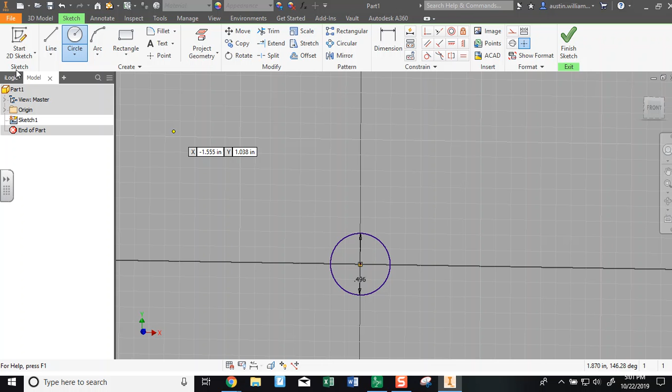And then on top of that, what I'm going to do is extrude that circle and give it some depth. That depth was about 1.059 inches, and here's what I got for my Tootsie Roll.

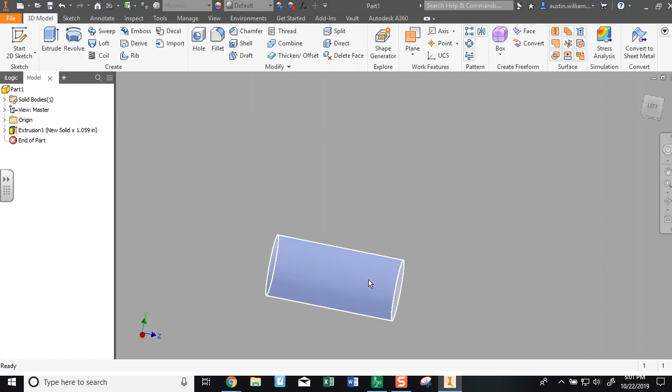Now we do know Tootsie Rolls have a brown color, so I'm going to hold the Shift key and click on each part. When you highlight each part, it allows you to change the color of multiple parts all at the same time. What I found is a good Tootsie Roll color is all the way at the bottom - a color called Walnut Natural Polished, and that makes a pretty good Tootsie Roll color.

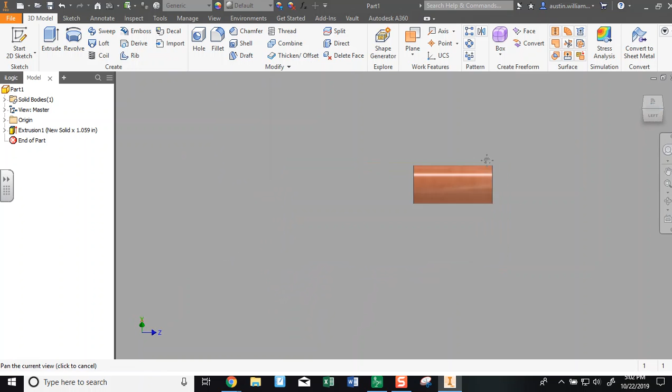Now that I've got my Tootsie Roll, I'm going to make my label. So very quickly, I'm going to start a new sketch, but I want to start my sketch right above this. In order to do that, I need to turn on my origin folder.

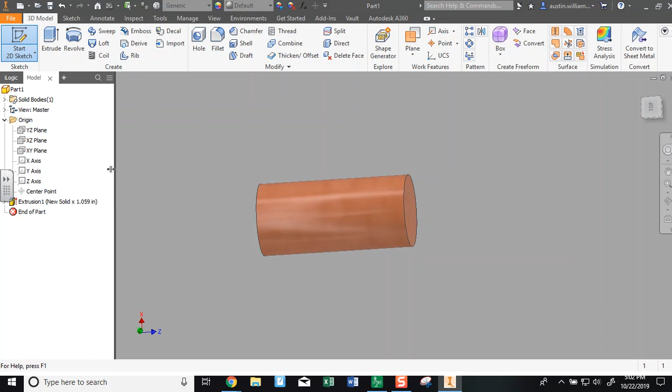So if I zoom in just a little bit, you can see that I can turn on one of these planes to allow me to draw sketches on them. Right now they're invisible, but I can start a new sketch on one of these, allowing me to draw a sketch above my Tootsie Roll.

We know the wrapper is a rectangular shape, and then I'm going to hit Finish Sketch. Oh wait, I'm going to go back there and dimension my sketch first.

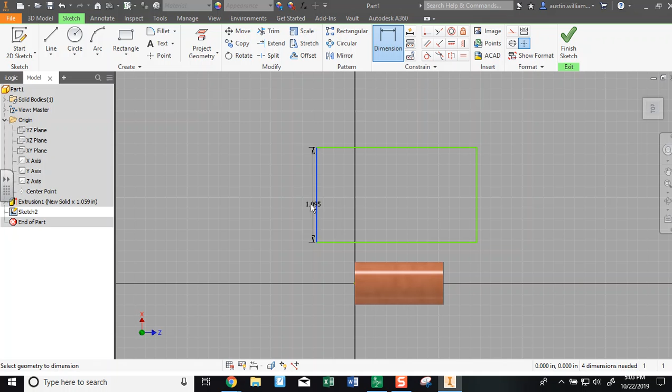So what I found out is my wrapper is... 1.3456, no sorry, 3457 inches. And then that width was 2.4788. Alright, and now I want to center this over my Tootsie Roll.

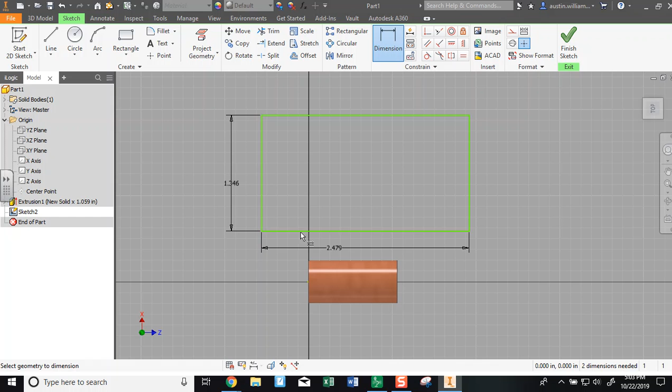So what I'm going to do is use this Move function. Move allows me to take an object - I'll highlight all that square, and I can move it where it's going to go. So I've highlighted all of it, select where I'm going to be moving it from, and that allows me to shift it just a little bit and line that up better.

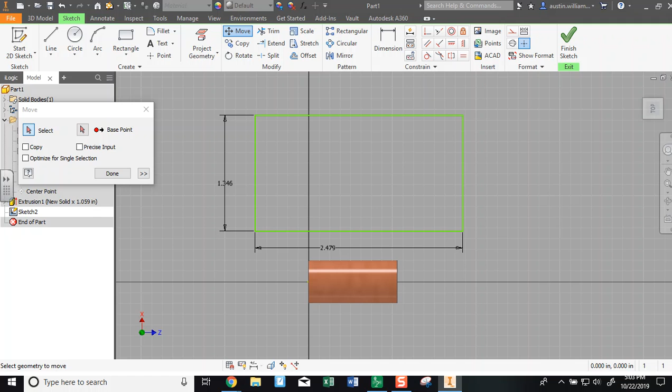Now what I'm going to do is hit Finish Sketch, and make my thickness of my paper. Now it's not going to be much, but my dial caliper showed me that the thickness of the wrapper was 0.041 inches thick.

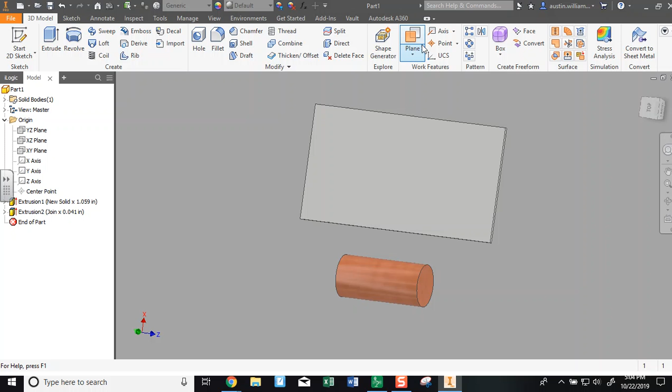And here's where the interesting part comes from. We could just color this white for a wrapper, but we're actually going to do a decal. In order to do that, I'm going to click Plane and Offset from Plane. This allows me to draw a sketch offset from another object. So what I've done is clicked on the face and dragged that new plane a little bit off of it. Click OK, call it done.

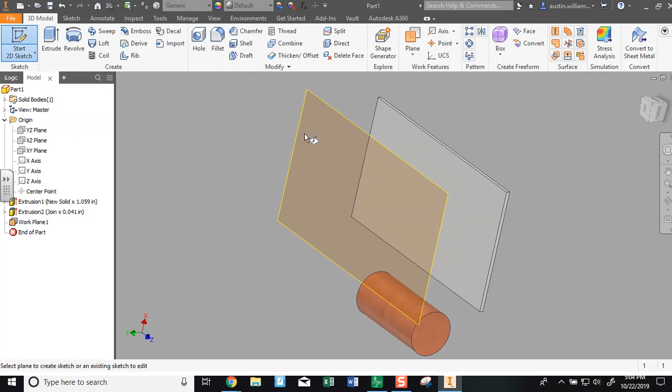Now what I'm going to do is start a new sketch on that plane that I just made, and I'm going to insert an image. What I've gone ahead and done is in my downloads folder, I should be able to find my Tootsie Roll wrapper. So Tootsie Roll right here.

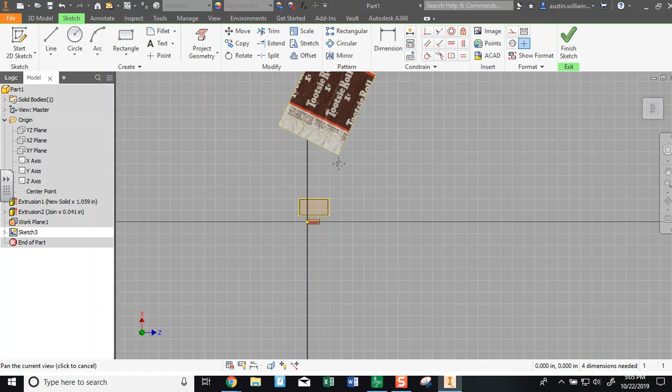Now it might come in very large, that's okay. What we're going to do is scale it down so that I can use this Tootsie Roll. Now the way to scale down an image is if you go to the bottom right corner, a little box will appear.

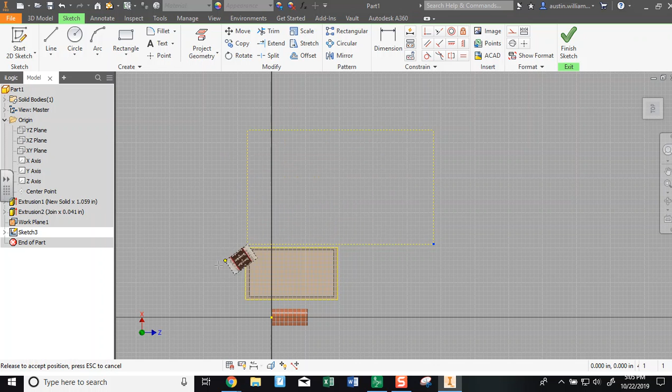That allows me to change the image around. I can rotate it, I can spin it. If the image is backwards, if you go diagonally, it'll reverse the image. That looks about the size I want it to be, so I'm going to bring it right over my label and hit Finish Sketch.

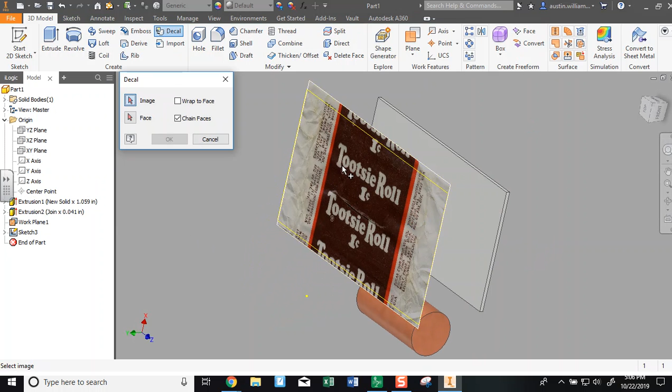Now I'm going to do a thing called Decal. Decal allows me to take an image and put it on the face of any object I want. So I click my image, then click the face I want, click OK. What it did is it took my Tootsie Roll image and put it on my wrapper.

I'm going to make that work plane invisible, and now I've got my Tootsie Roll. I'm going to save this.

I'm going to go back to my Inventor folder. On your desktop, you should find your Inventor folder. Tootsie Roll, I've already made one, so I'm going to go ahead and call that Tootsie Roll IPT, hit save.

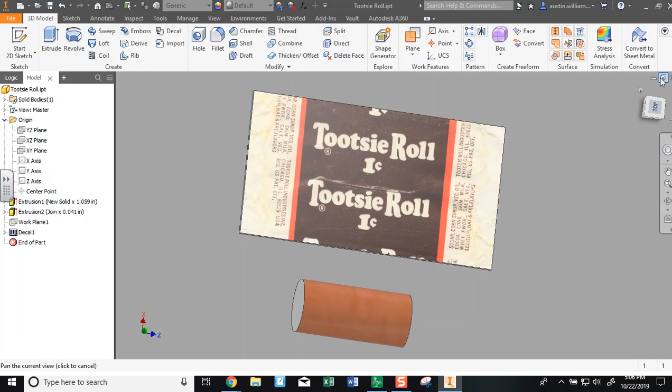Since this is saved, I can close out of it and open up a new project. This can be MCHS IED title block. Type your name in all caps, and for project title, we'll call this Tootsie Roll. Hit OK.

On this drawing file, what I'm going to do is select a base. My base will be my Tootsie Roll, so I'm going to go into my folders, go to my desktop, and find my Tootsie Roll.

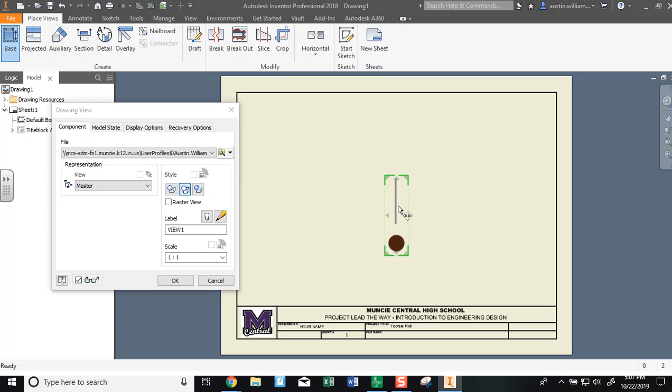Sometimes Inventor will automatically pull the last part you made for you. Sometimes it won't. Inventor does a pretty good job of thinking for you in some instances, but this time it just didn't do it for me.

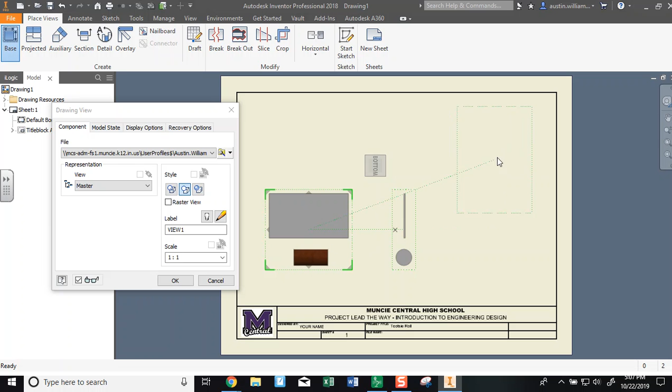What I'm going to do is move this around until I get it exactly how I want it to look. Now I'm going to make it a little smaller because I still need my right side view, since I can't see all my dimensions from just the front face. Then I'll click on the top right to make my front and right isometric views, and add shading. We've done shading quite a few times, so I'm not going to slow down for that one.

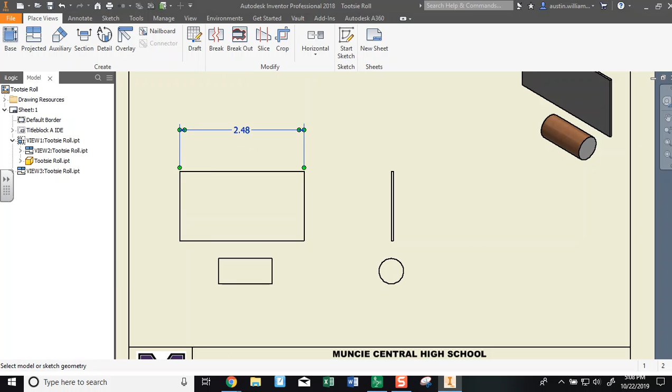What I am going to do is show how we do dimensions for our parts here. We have a specific precision for this activity. When I go to dimension an object, Inventor automatically uses 2 decimal places, and I don't really want that. So when you go into dimension, you can double click and it'll allow you to change how many decimal places you want to see.

If I double click on a dimension, usually this edit dimension tab pops up. Under precision and tolerance, primary unit, we click on 4.1234. That means I've got 4 decimal places, and hit OK.

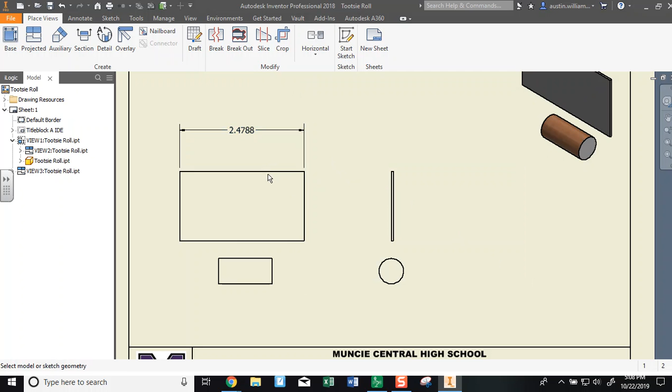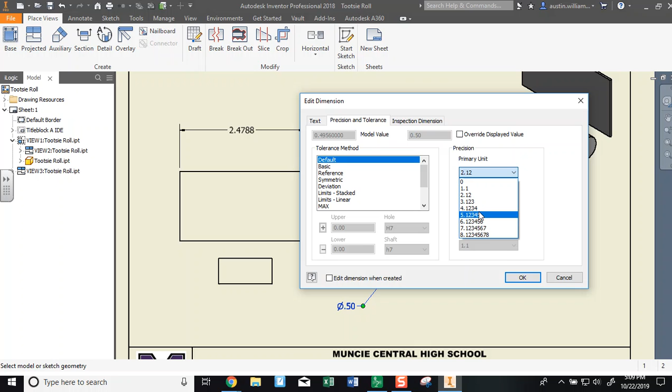Now when I do this, on each dimension we can change our tolerance to 4 decimal places. One more for the diameter here - we have 4 decimal places. That's not the number I want, I want to do the width here. And 4 decimal places as well.

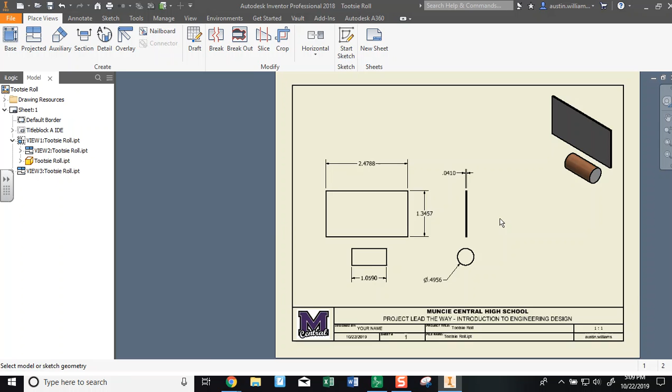So what I've done is I've now got my drawing file of my Tootsie Roll, including the wrapper. And on top of that, I have my front and right side view.

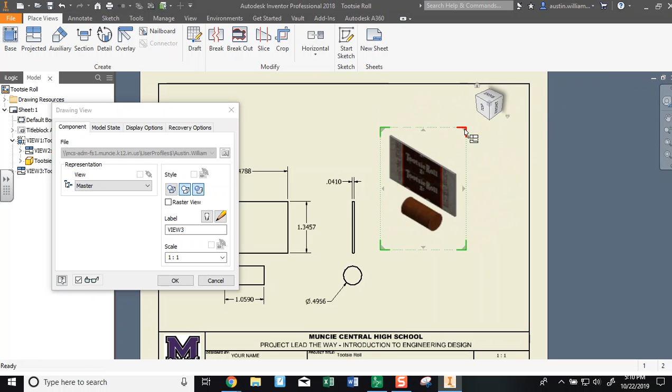What I just noticed is that my isometric view here is backwards - I don't see that Tootsie Roll image. So I'm going to double click on it, and rotate this around until I find my Tootsie Roll image. And there we go. I'll call this the front right top isometric view of my Tootsie Roll. Click OK, and then call it done.

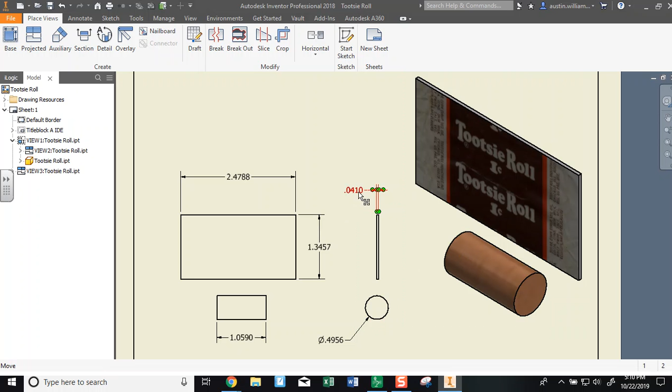Alright, what I want you to do is take a screenshot of this and submit it to Schoology for your points. I want to see the 4 decimal places, your 3 known values on your dial calipers, and your 1 digit, or 1 decimal place of uncertainty. Okay? Good luck. If you have any questions, let me know.